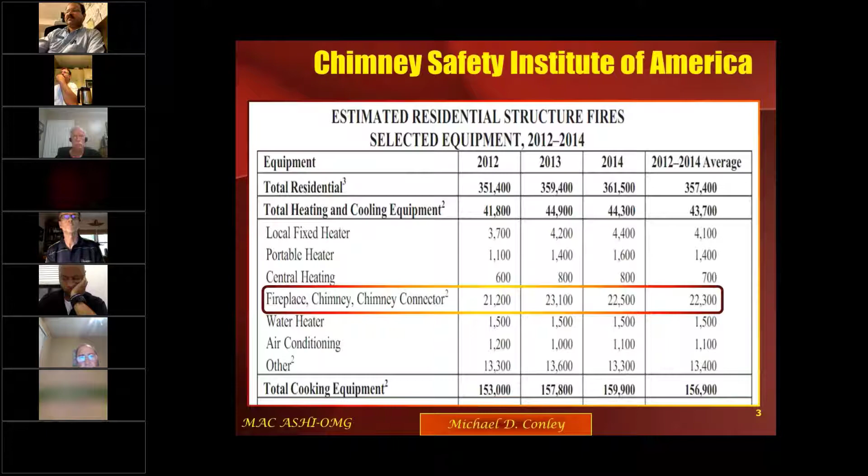Projected fireplace market from 2018 to 2023, you can see the numbers are increasing. More and more people are getting fireplaces. So it's becoming more and more important that we as inspectors know what to look for and how to evaluate them.

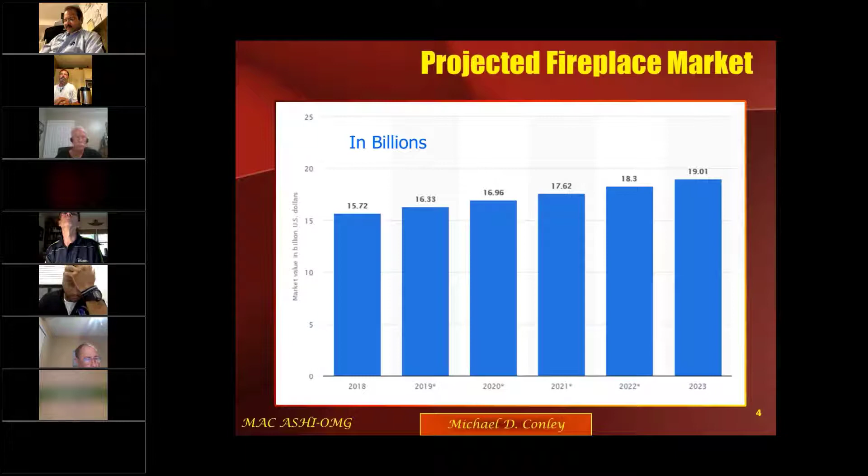Modular fireplaces: Heatilator is the leading brand. It's the most well-known in this country, but there are other manufacturers out there, and depending on your market area, you're going to run into some more than others. I see a lot of Heatilators in my market area, and a couple of these others, but that's just a regional thing. You go to different parts of the country and you're going to hit different manufacturer names. They're all basically designed the same.

They all have data plates on them. I don't know if any of y'all are aware of that, but they all have data plates when they come out of the factory. And that data plate tells you a lot about the manufacturing of the fireplace and what its specifications are. And one of the most important ones is the date of manufacture, which is important for us to have and be able to put in our reports.

This is a 1935 masonry fireplace. It's brick and it's been parged. And you're probably wondering, does a little guy go down there and start parging on his way up? No, it's parged as it's built. And you can see where some of the parging is starting to come off, exposing some of the brick.

Now that could be a safety factor depending on your market area. A lot of municipal inspecting areas do not consider brick fireplaces safe if they don't have a liner inside of them. But that's going to vary depending on the authority having jurisdiction, which is basically the municipal inspector or the fire inspector. He's going to determine whether that's in fact the case in the market area you're inspecting in.

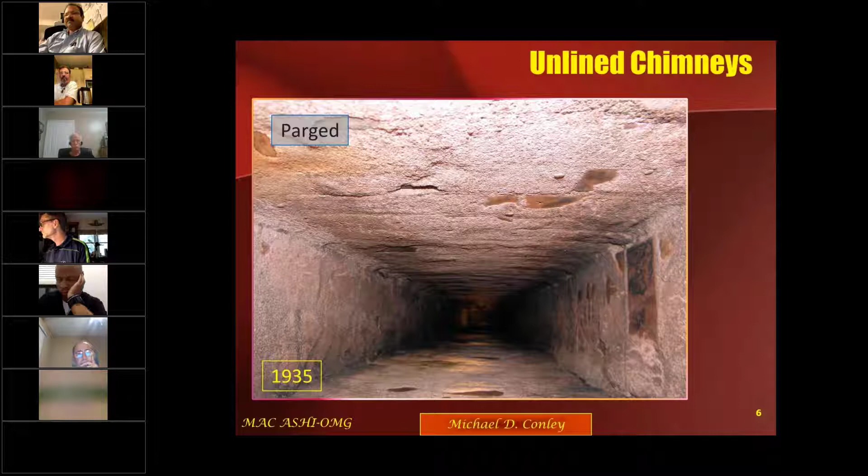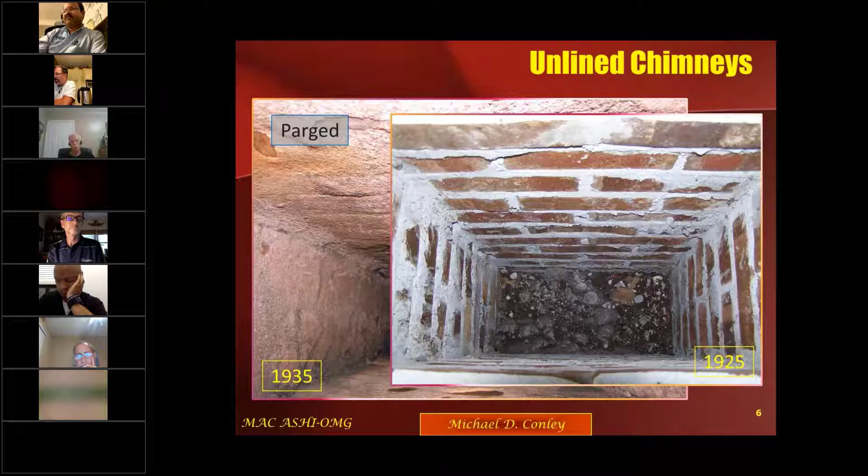Here's a bare brick with excess grout in it. Again, that would be determined by the fire marshal or the fire inspector as to whether or not that would be safe to use. There are manufactured liners that can be put in existing brick or concrete block fireplaces that will serve the same purpose, but that's a whole different subject. We can talk about it at a later date, and I'll have more on this subject throughout the year.

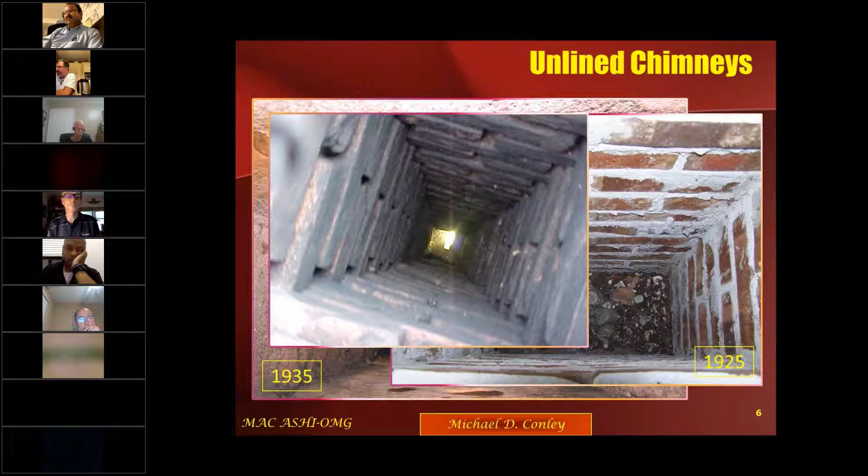Here's a bare brick wood burning fireplace, and you can see where the grout has been eaten away, and that's due to the acidity of the smoke going up the chimney, eating away at the grout slowly. And that's one reason why a liner is so important, because a liner is not affected the same way that brick or grout is.

The hearth, a lot of people misconstrue this. The hearth is not the outside of the fireplace. The hearth is actually where the fire is. And what's outside the fireplace is called the hearth extension. Not a term you hear a lot, but those of you who have done some fireplace learning know this. And it's a good idea to use the proper terminology and definitions when you're writing the report.

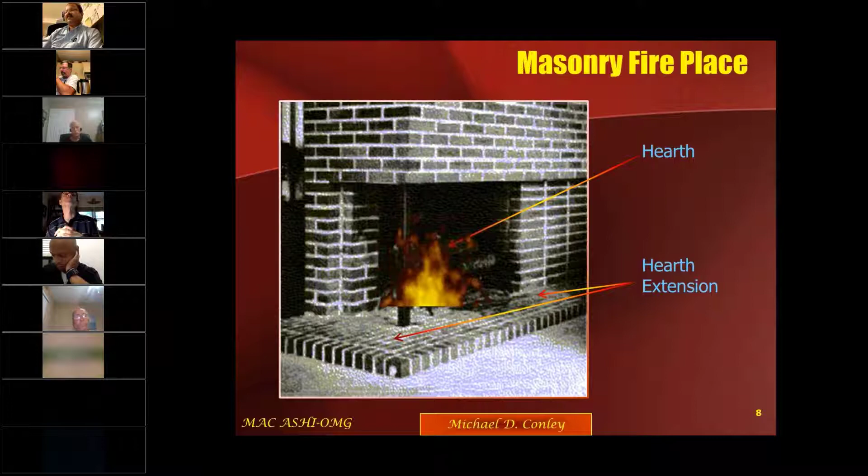Chimney foundations. Brick or block chimneys should have their own foundation. They should be independent of the foundation of the house. If you've ever come across a chimney that's utilizing the foundation of the building as its foundation, that's wrong and dangerous. It should always have an independent foundation.

Sometimes you cannot determine that, depending on where the chimney is. If it's in the center of the building, for example, the center of the living space, and there is no crawl space or area underneath the building you can access, then you're not going to be able to determine whether it has one or not. But if it's on the outside wall of a building, then you can determine it.

Foundations for fireplaces should be at least 12 inches deep or more, and at least 6 inches larger than the chimney on all sides. So that's easy to probe if you have a probe with you. Or it's going to be determined by the local authority having jurisdiction, which is going to be the fire marshal or the municipal inspector. Fire brick typically should be no less than 2 inches thick with an 8-inch thick wall, or 12 inches without the fire brick.

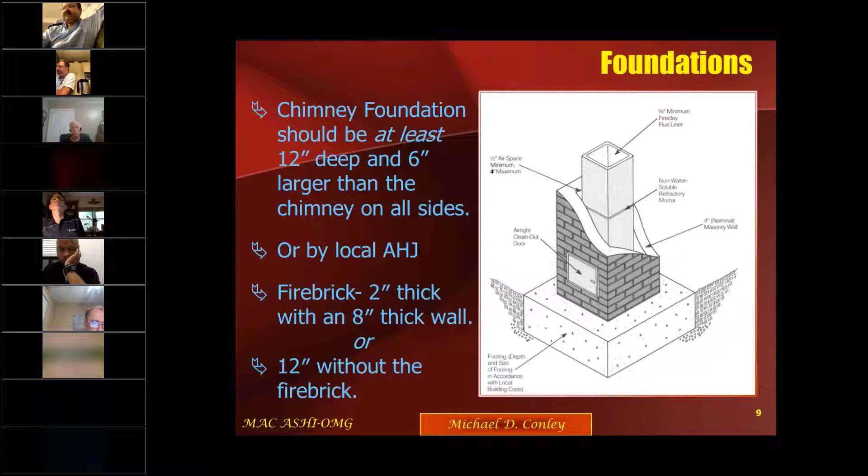Hey, Mike. Yes. Comment that says, I see fireplaces on second floors. What about those regarding the foundation? Well, if you follow the chimney, you're going to find that it goes down through the first floor, and then down through the foundation of the first floor, down into the cellar if it has one. And if not, then you're not going to be able to determine where it goes from there. But it should go down through, right? Oh yeah, you can't have a brick or concrete block fireplace sitting on construction material. It won't support the weight.

Something I don't normally do is probe for the footer, but in this case, I suspected the footer, so I probed it and found that it has no footer under it at all. Why it lasted this long, I don't know, but it's definitely moving and dangerous to use.

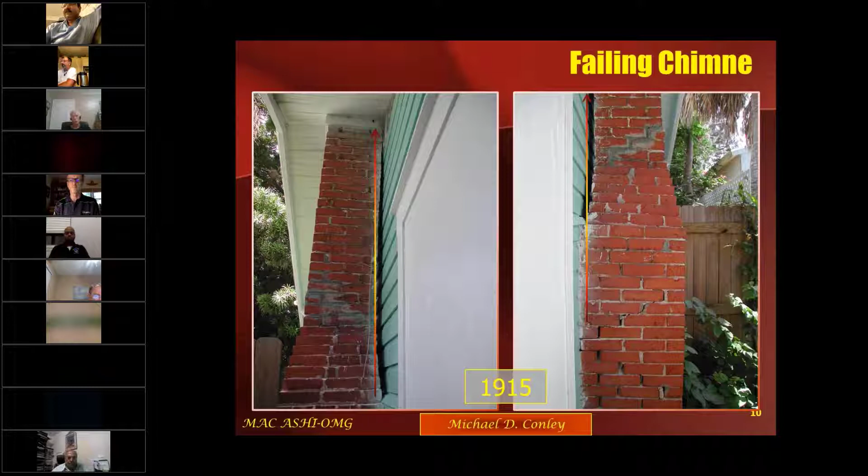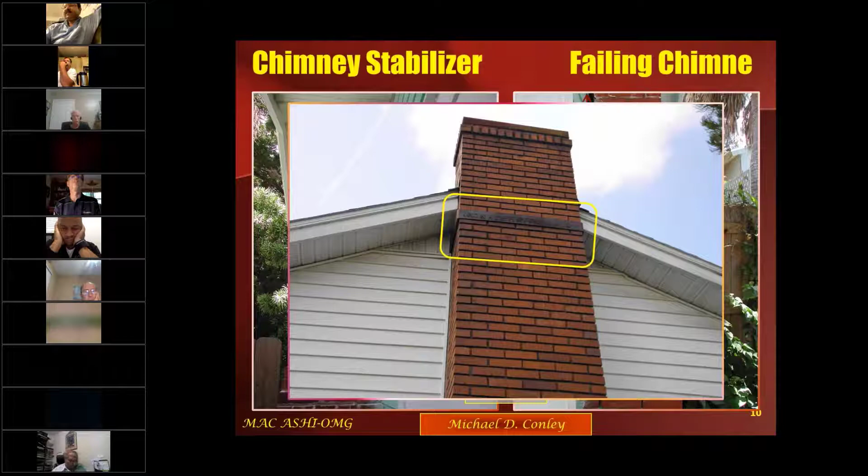Here's one where they had a foundation issue and they stabilized it. It was a very minor foundation issue, so they stabilized it by putting a steel band around it and securing it inside the attic, probably onto the joists or rafters. That's a fix that some municipalities will accept and others won't.

Pyrolysis. This is an important aspect of inspecting because it determines the safety of the brick or concrete block. Pyrolysis is the slow, low heat degradation of wood causing dehydration and charcoaling of the framing material. It's imperative that fireplace clearances and combustible material be protected and or have proper clearance to prevent fire. This also affects the inside of the hearth.

If you poke your head inside the hearth with your flashlight and you see any kind of exposed insulation or wood framing, that is going to be a dangerous situation because those materials will be exposed to the slow heat degradation and dehydration. And once you lower that in any kind of combustible material, you lower its ignition point.

Normally, wood ignites, for example, between 400 and 500 degrees. But if it's been affected by pyrolysis or dehydration, that ignition temperature can drop down to as low as 200 degrees, which a fireplace can easily meet. So you don't want to see any kind of exposed material inside of a hearth. It should all be non-combustible material.

Yes. If you see pyrolysis on a structure somewhere, would an engineer need to sign off on it? The short answer is no, because of charring. Let's say there was a fire that reached the attic, and you're inspecting the attic, and you see charcoaling on the joists or the trusses. Charcoaling on wood actually acts as a fire barrier, but it's a very, very thin layer. And once you go beyond that thin layer, then it goes into the engineering category.

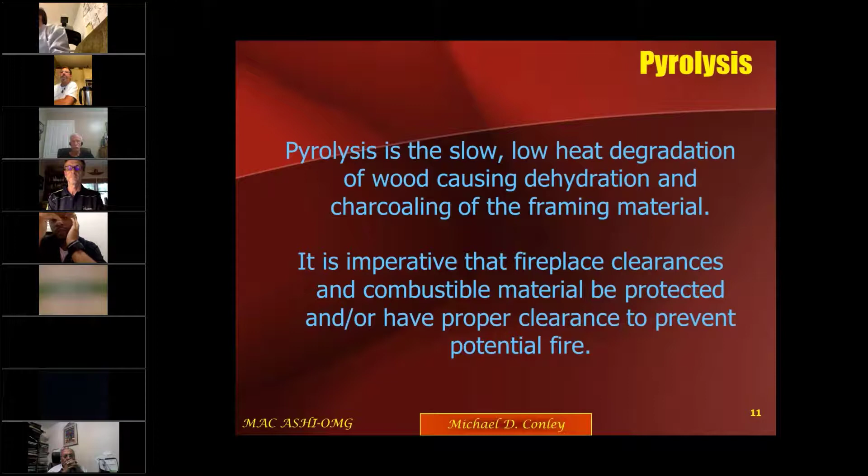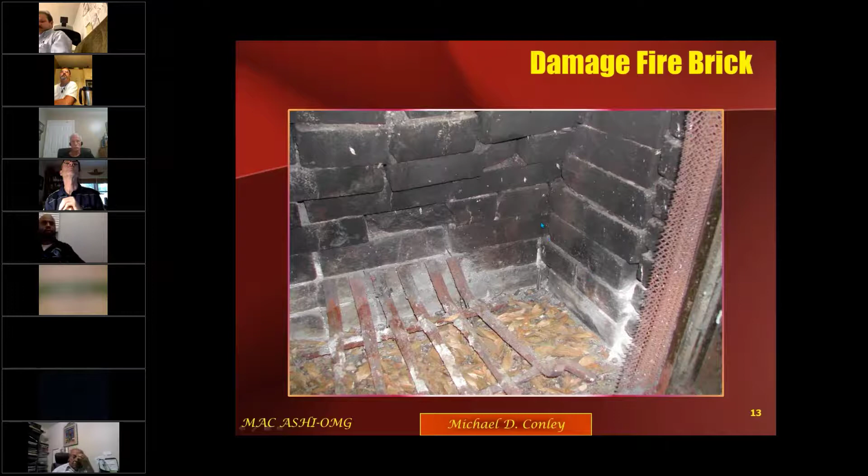Same hearth with a different view. This is a dangerous hearth to burn anything in, and the likelihood of a fire, if they don't heed your warning, is pretty high.

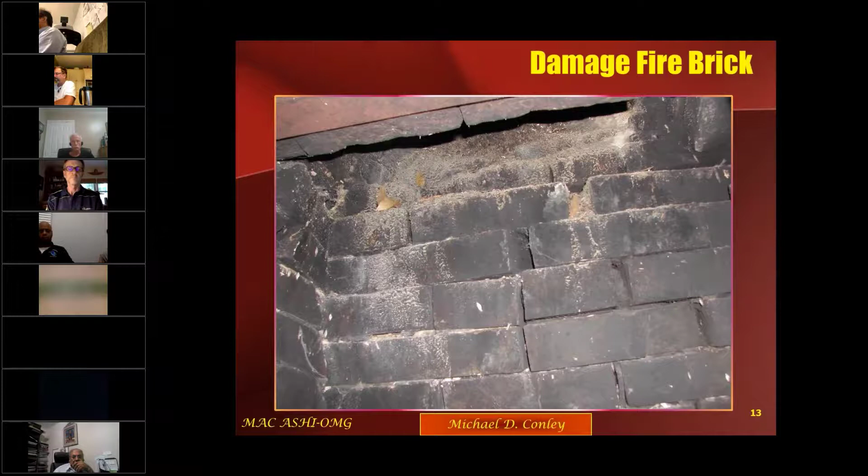Fire brick. It's different from regular brick in that it has no air entrained into it. It can withstand high heat, has low thermal conductivity. Fire brick can be laid either flat or on edge, as long as it's no thinner than 2 inches thickness. The minimum, that's what that next statement says. Minimum thickness is 2 inches, of course. In addition, the chimney liner should have a minimum of half-inch spacing between itself and the inside of the chimney brick.

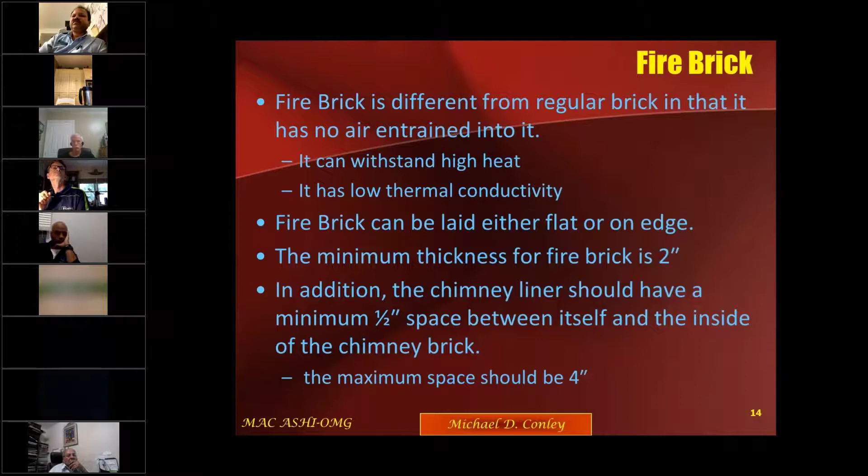So let's say you have a concrete block chimney and you poke your head inside and you see there's a brick in there. The brick and the concrete block should not be in contact with each other, because that'll transmit a certain amount of heat. That's where that half-inch space comes in. It acts as a cooling space. And you can go as much as 4 inches of clearance if you want to, but that's kind of just wasting space. And quite honestly, I've never seen a chimney with that kind of clearance in it. A half inch to an inch is pretty common.

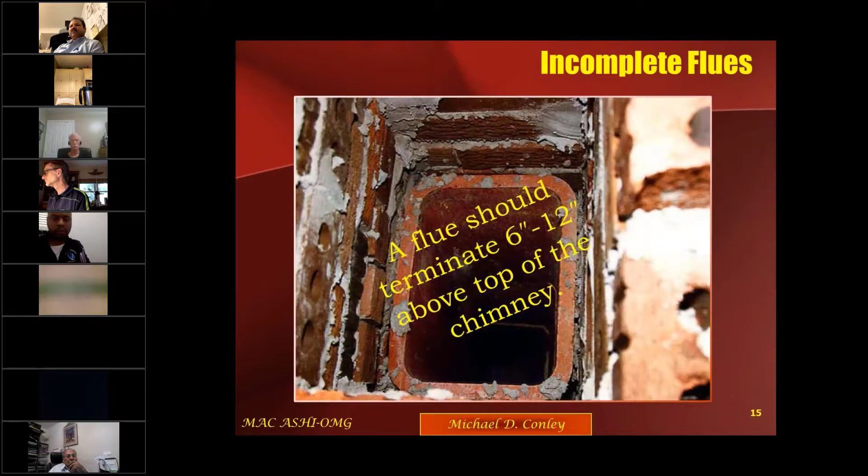A flue should terminate 6 to 12 inches above the top of the chimney. This is not doing that. This is not doing that. This is not doing that. That's a beautiful chimney, by the way, but it needs a new top. It needs a new cover on it.

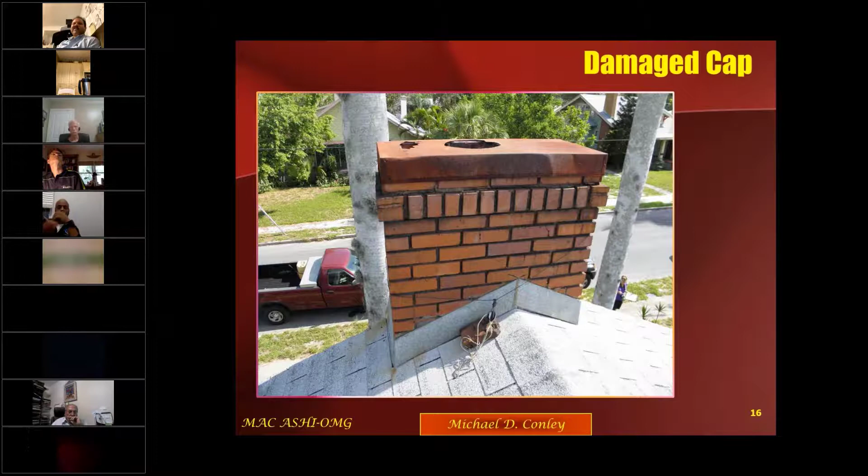So when you're seeing flues on the inside of chimneys with creosote being built up, you ought to call it out as a safety feature. Warn your clients not to use the fireplace until it's serviced. In the summertime, that's not a big deal. In the wintertime, it's more important because that's when people tend to use their fireplaces.

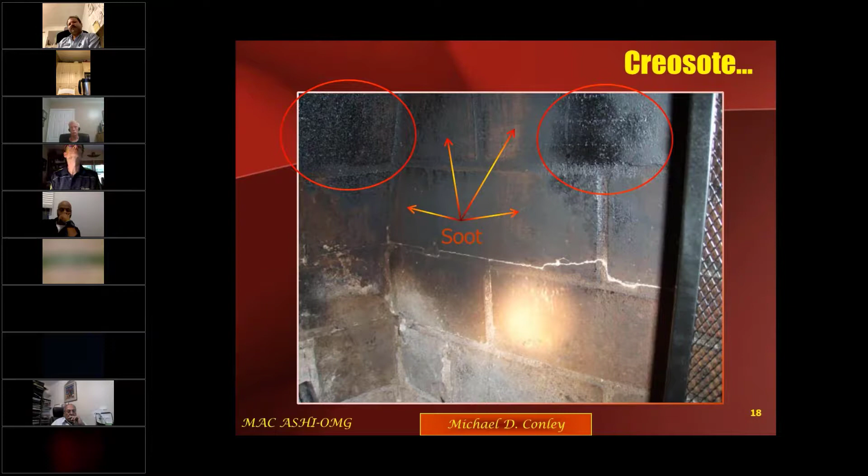The shiny black stuff, creosote. The dull black stuff, soot. Soot is not a combustible. Creosote is. Massive buildup of creosote.

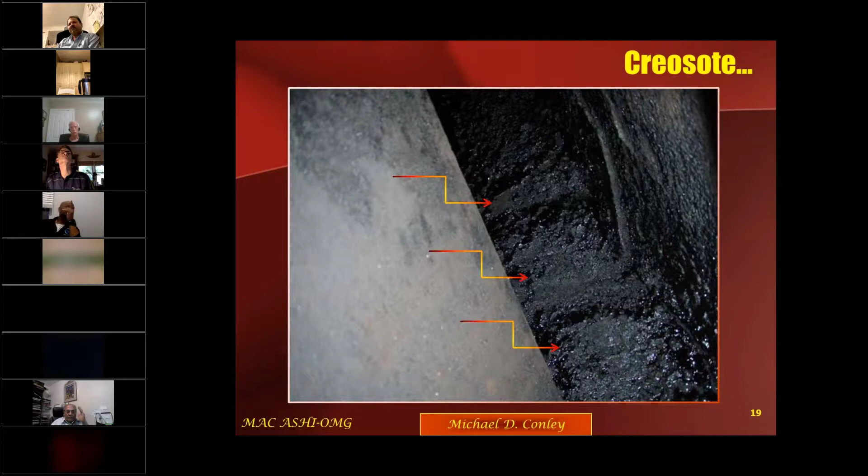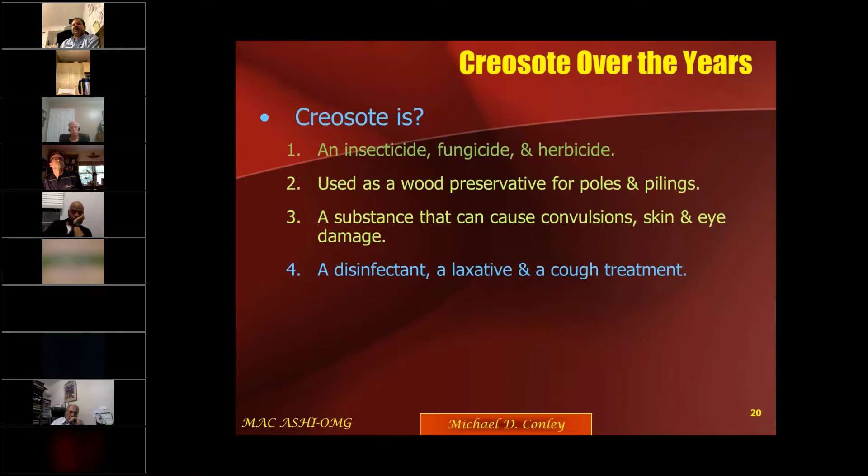In the early years of our existence, creosote was used as an insecticide, a fungicide, and a herbicide, and it still is in some parts of the country. It was used as a wood preservative for poles and pilings, like telephone poles, and it's still used today for that. It's a substance that can cause convulsions, skin and eye damage, so you really don't want it on your person. It's a disinfectant, a laxative, and a cough treatment. People actually used to consume this stuff in the old days. They don't do that anymore.

It's a substance that causes skin cancer, a byproduct of wood burning in a fireplace, of course, and a combustible coating of flue. All of these things apply to creosote. Dangerous when it accumulates within a chimney. The primary danger of creosote is that it is extremely flammable. In the United States alone, an estimated 25,000 chimney fires are caused by creosote ignition each year. That's a lot. You don't want to be the inspector that did that house the day after or the day before they had the fire.

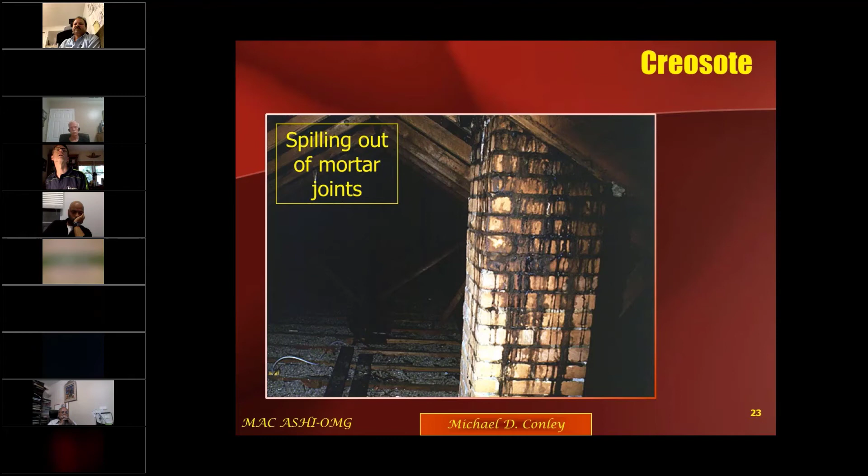More buildup. This is so bad it's spilling out of the joints in an attic. This is the result. Thank you.